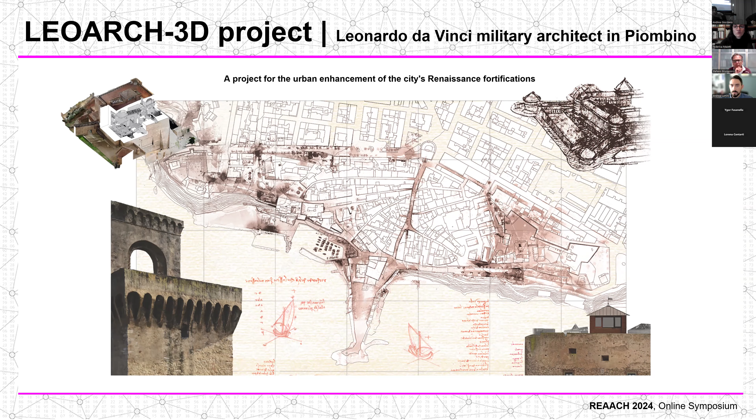During the first phase of this project, which was the basis for our research, an extensive archival study was carried out with the goal of defining a reliable outline of the evolution and development of Piombino's fortification in regard to Leonardo's design interventions. In particular, it deepened the study of the Madrid Codex II, on which Leonardo described through drawings and sketches not only the interventions carried out, but also the surveys he conducted for these projects.

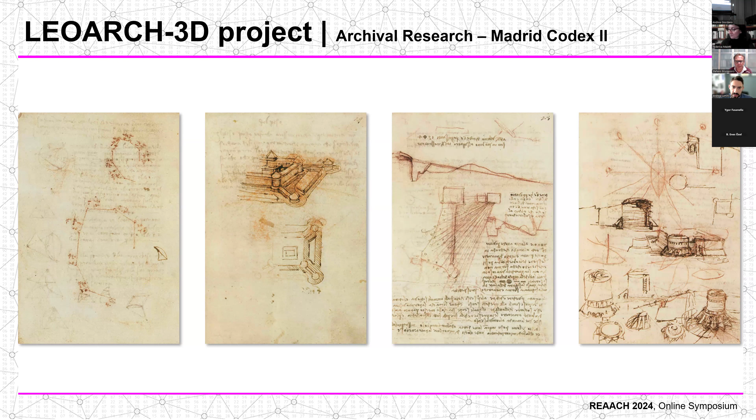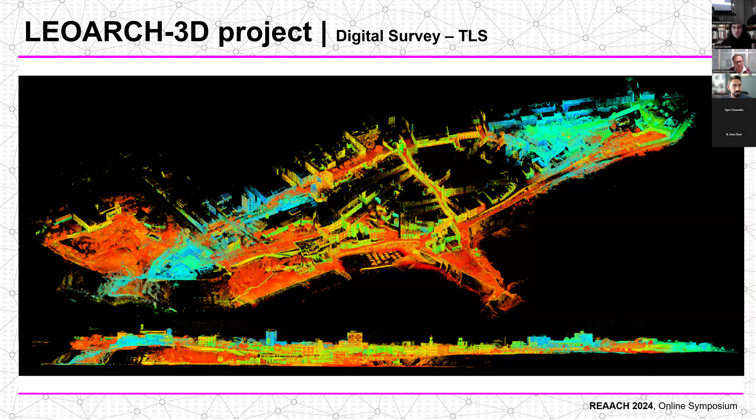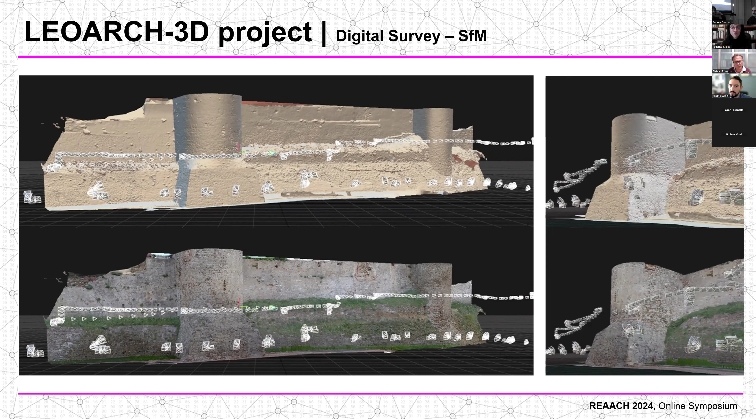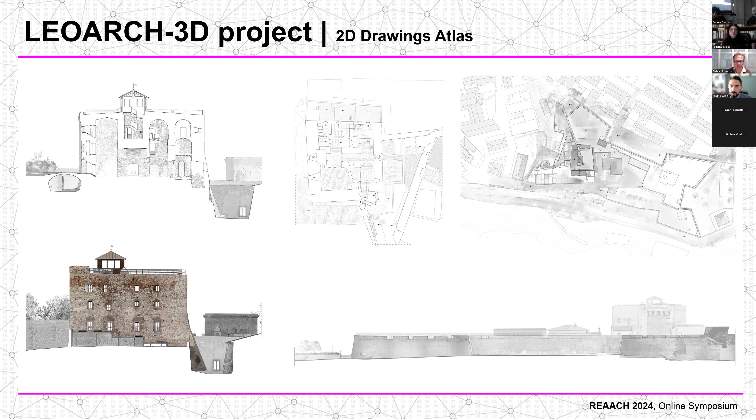These massive acquisitions were then represented graphically by means of canonical technical drawings, such as wireframes on photo plans of elevations, sections, and plans, through which a sort of 2D graphical atlas of the survey drawings was developed. These graphical and dimensional results were used to conduct a comparative critical analysis between the digital survey data and Leonardo's data.

Through a careful alignment work between the various sketch drawings and the technical drawings, such as plans and sections, it was possible to understand Leonardo's design techniques and his ideas in the field of military fortification for Piombino.

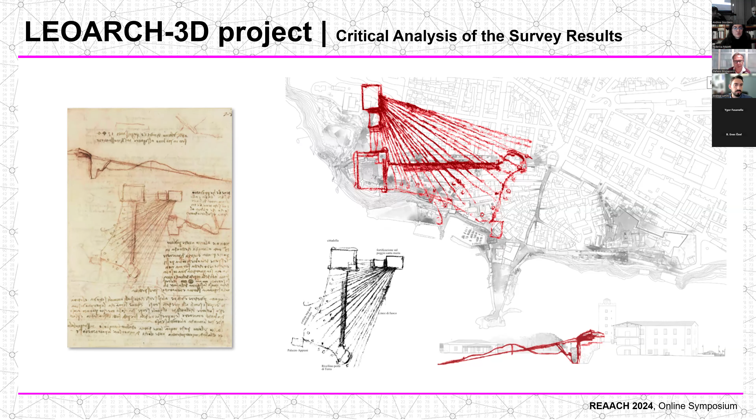These results were then used to define a series of simplified 3D virtual reconstructions of the defensive architecture of Piombino, realized or only just conceived by Leonardo, thus establishing the basis for the definition of guidelines and protocols for their valorization through a virtual fruition system.

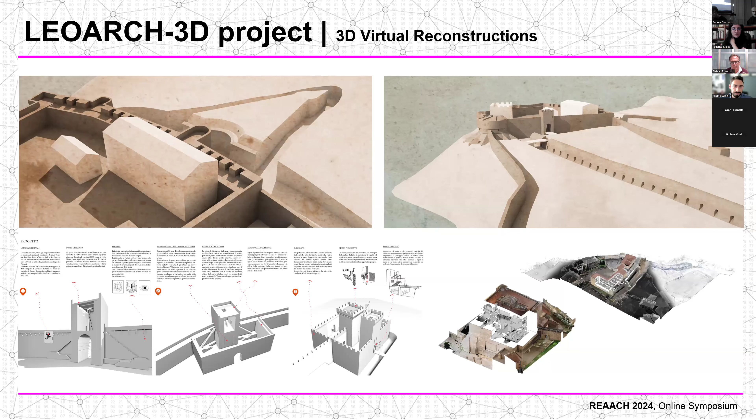And even though probably it was not directly designed by Leonardo, it fits deeply into the historical and design context of the Leonardian intervention for the defensive consolidation of the city system.

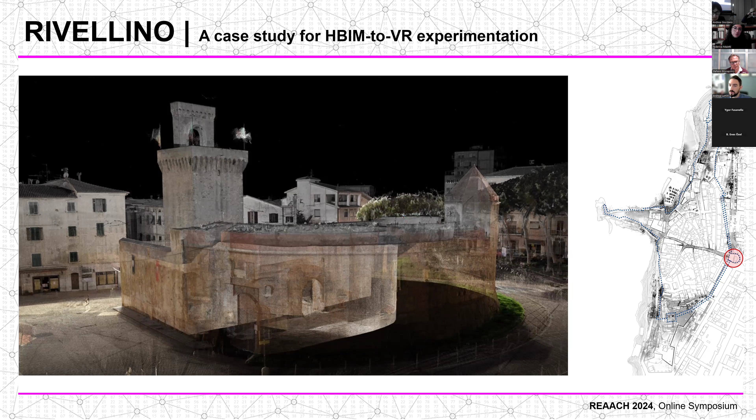As we said, from a methodological point of view, the workflow is similar to the one of REAACH-ID. It starts from the documentation phase, archival through the study of the Madrid Codex II, and architectural through digital survey, while the next step involves scan-to-BIM modeling and virtualization within a VR platform.

These last points, as you will see, are still work in progress, but the goal is exactly to develop a VR experience or an architectural visualization system for direct interaction with the HBIM information metadata associated with the models, in order to lead to the virtual rediscovery of the defensive architecture of Piombino.

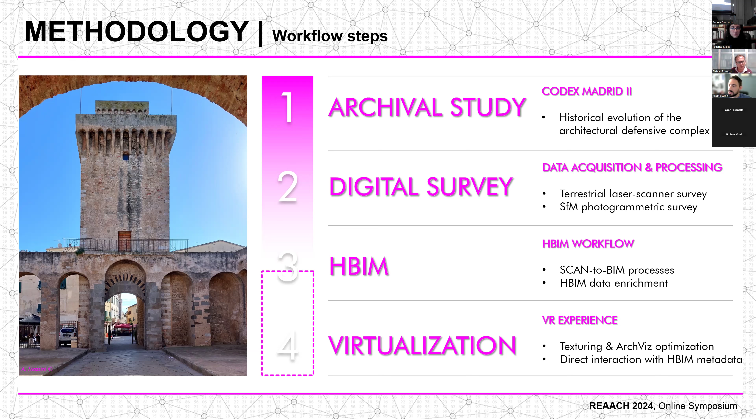With regard to the archival study, we mainly used the open source digital platform e-Leo, developed by the Biblioteca Leonardiana, within which it was possible to view and query the actual pages of the Madrid Codex II and many other Leonardo manuscripts with all their inscriptions and drawings. This research made it possible to reconstruct the historical and projectual evolution of the architectural complex and its relationship with the other defensive structures in Piombino.

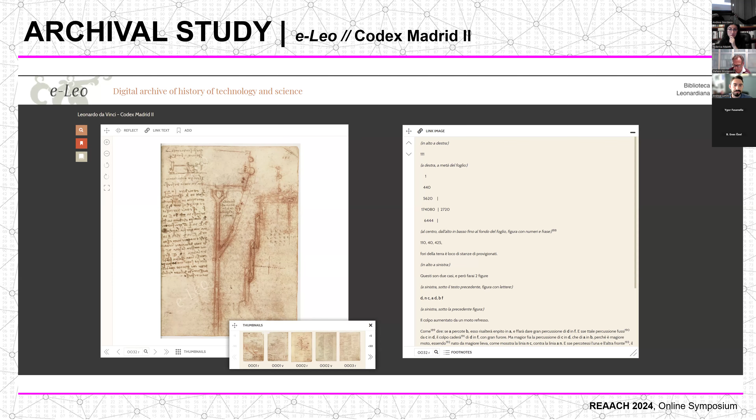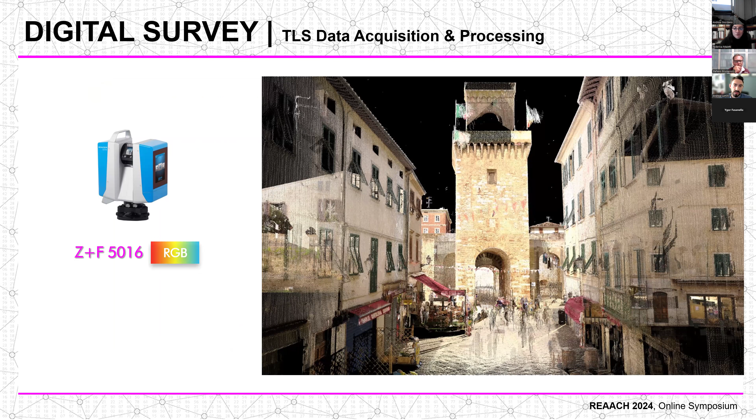With regard to the digital survey of the Rivellino, it was conducted with a terrestrial laser scanner, a Z+F 5016, through which about 80 color scans were acquired. Here we can see the point cloud of the road to the Porta Terra, and here the global point cloud of the complex with all its components and exterior contexts.

In parallel with the laser scanner survey, a series of structure-from-motion photogrammetric acquisitions were conducted through a Sony Alpha 7 III, which made it possible to record more accurately the colors and materials of the Rivellino's wall structures.

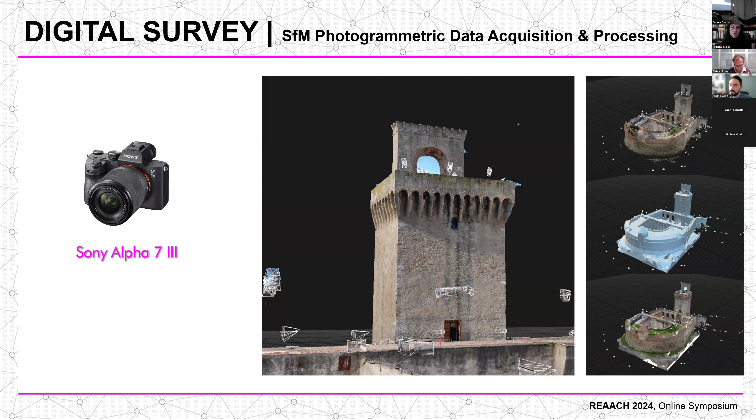The various point cloud models were then processed and integrated with each other within the Leica Cyclone management software, and then exported into RECAP Pro, thanks to which it was possible to use the global point cloud to carry out the scan-to-BIM modeling processes within Revit, the BIM authoring software used for this work.

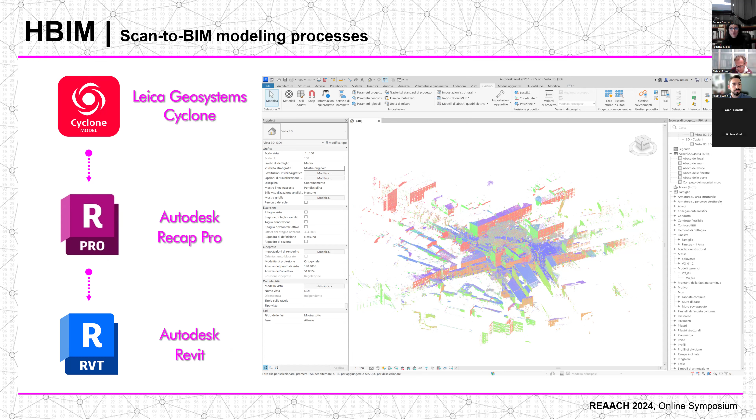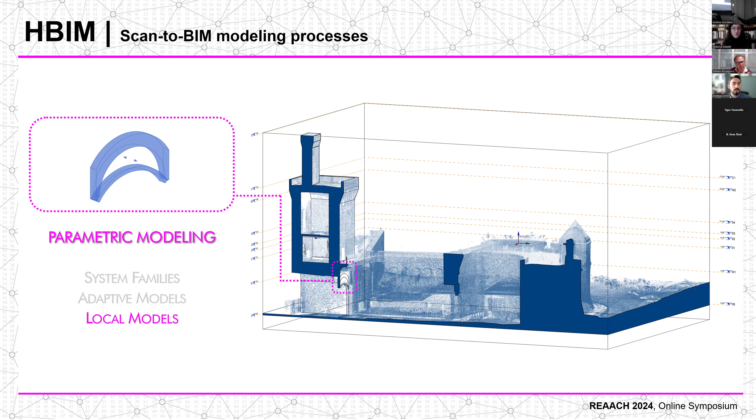With the support of this data, we carried out the next phase dedicated to the HBIM modeling and virtual reconstruction of the Rivellino, where the relevant heterogeneity of elements, mainly due to multiple transformations the complex has undergone over the centuries, allowed us to test processes for translating instrumental metric data into parametric and informative models. Various scan-to-BIM approaches were considered, such as parametric adaptation of system families, creation of adaptive models such as for the vaults, and local modeling for components with complicated morphology.

The HBIM modeling process was then followed by those dedicated to information data enrichment. We defined specific shared parameters to be associated with each element in order to classify them according to the following macro categories: anagraphic, dating, structure, and diagnostic. These textual and graphical parameters, such as description, construction phases and techniques, or state of preservation, made it possible not only to enrich the HBIM digital twin database, but also to prepare it as an information base to be eventually queryable in other platforms.

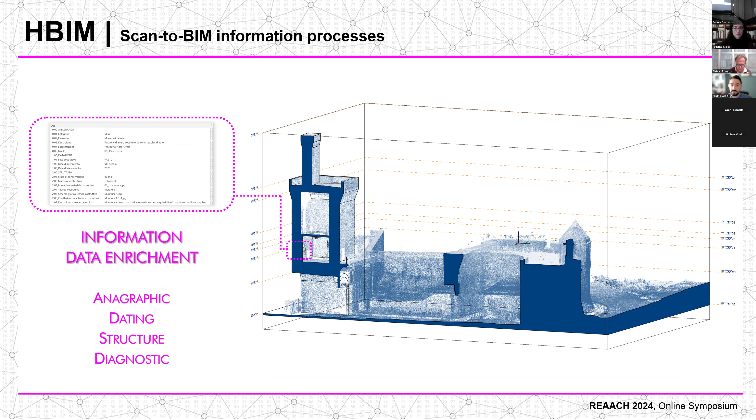In the same way, the respective archival data developed by Leonardo were linked to the HBIM model in order to make it queryable from this point of view as well. Additionally, a series of simplified reconstructed models were developed, always within Revit, in order to make the architectural development of the complex more readable.

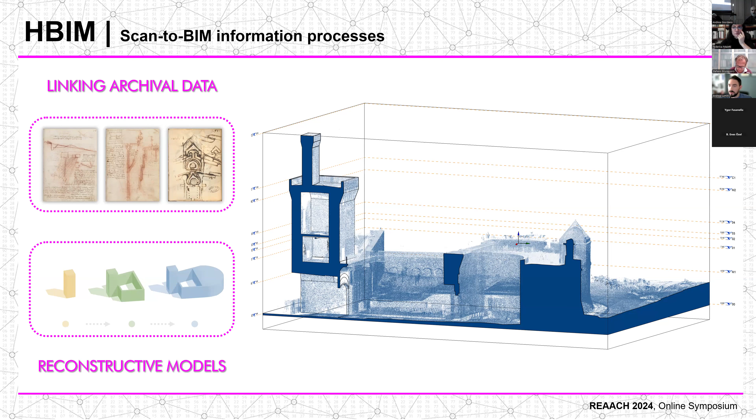In conclusion, as we said, the final steps of our research are still a work in progress, but can be listed as follows. The HBIM model's texturing will take place within Twinmotion, importing the HBIM model through the Datasmith plugin.

It will involve the creation of specific materials based on photogrammetric data in order to be applied photorealistically to the model surfaces. The second step, regarding VR optimization, will take place instead within Unreal Engine, still through the Datasmith plugin. It will involve the graphical optimization of the virtual scene and its real-time architectural visualization.

In parallel, the virtual fruition platform will be developed through visual programming scripting and will allow not only navigation of the model and its components, but also interaction with its informative metadata, thus creating an immersive VR experience dedicated to the rediscovery of the architectural complex through direct and real-time interaction with the HBIM models related to the actual state of the Rivellino, its evolutionary phases, and even the reconstructive project state based on Leonardo's sketches data.

Finally, we think that this can become a methodological case study to expand this experience and deliver it to the entire city of Piombino, possibly integrating it with georeferenced GIS tools.

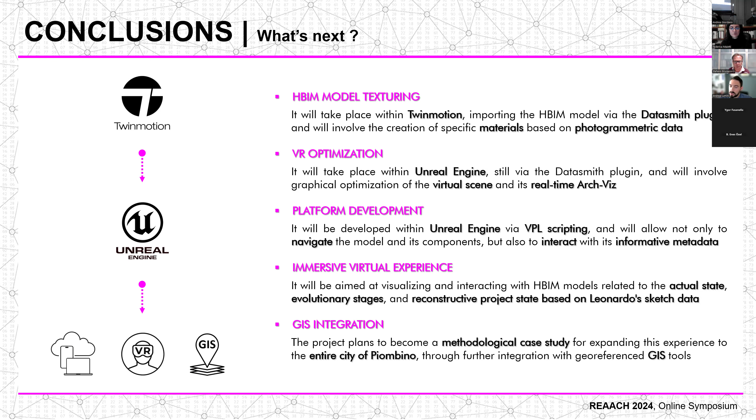Lastly, to conclude, our research, even though it's still a work in progress, tries to highlight the methodological potential of integrating parametric scan-to-BIM modeling and VR systems in order to enrich the understanding, fruition, and public engagement with historical structures such as the Rivellino of Piombino, by a wide user base - technical, historical, touristical - but also to identify new tools and opportunities for the valorization and dissemination of cultural heritage.